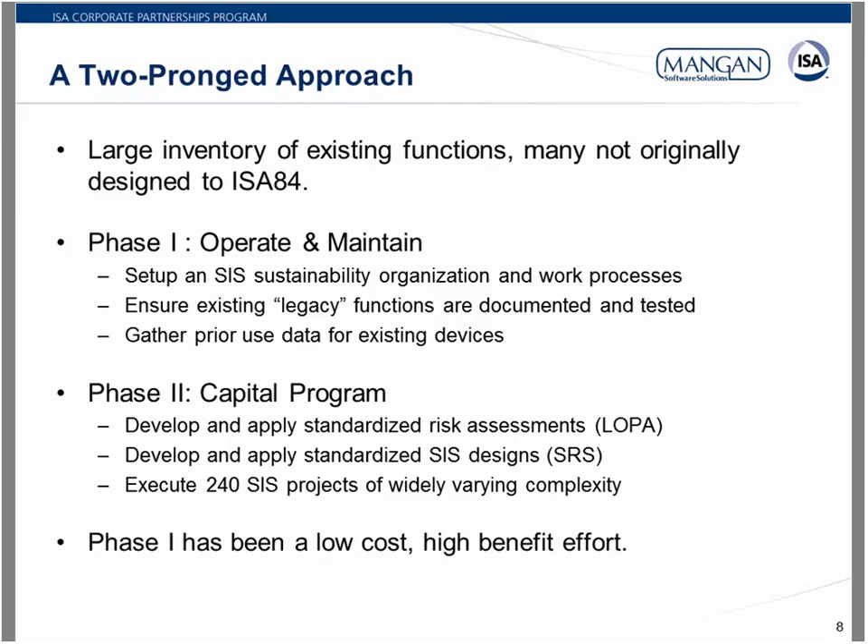Okay, thanks, Alec. So with that, we're going to move to our first poll question.

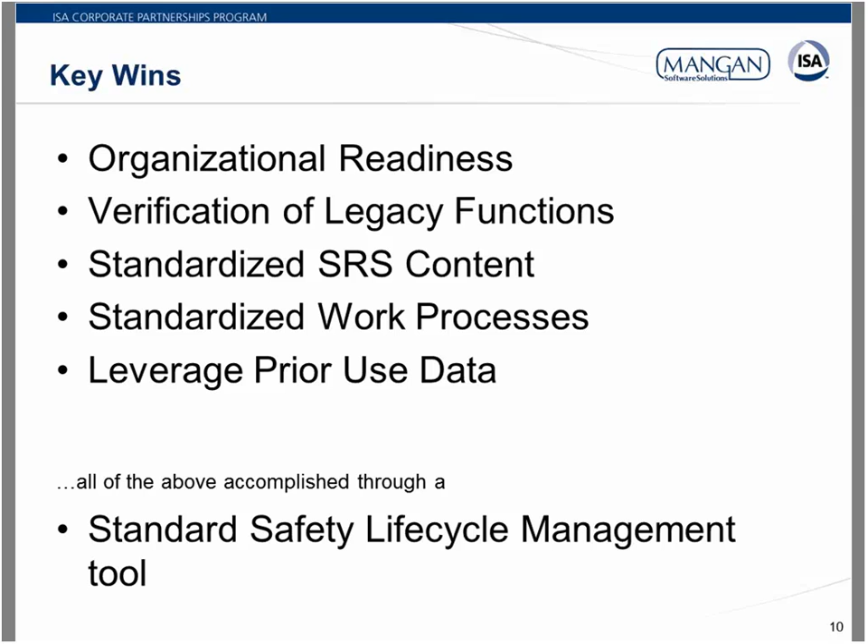So starting off, design of the SIS organization. One of the things we recognized early on was that the skills of SIS testing and maintenance are not the same as basic E&I skills. For example, knowledge of common mode failures, the importance of proof test coverage, et cetera - these are not things in the basic E&I toolkit. So the first step for us was defining these required skills and competencies and starting to track them.

To facilitate that, we created designated SIS O&M coordinators at each site, and also SIS engineers, and then a dedicated SIS group reporting to the O&M coordinator. Subtly but very importantly, originally many of these teams were based out of technical organizations - with the history of SIS, it kind of originated out of technical organizations, and that knowledge has stayed there. So we're making a conscious effort to push that knowledge and work processes out of the technical organizations into the maintenance and reliability organizations. Having these designated contacts is a key part of that. We'll get into more detail on that later.

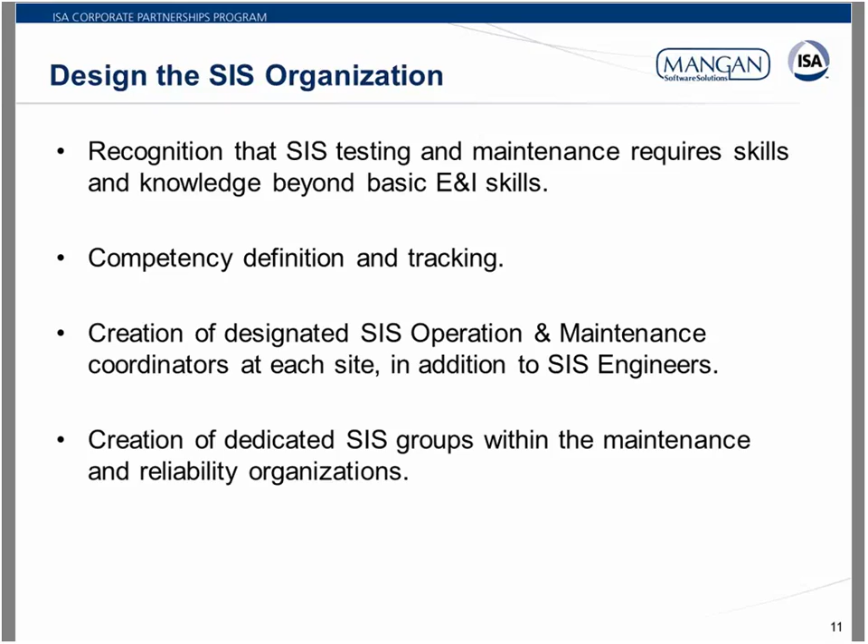Verification of legacy functions. So I started off earlier by stating that we have a large inventory of existing functions, which we just generically call legacy instrumented functions. Many of them are clearly safety functions, although they may or may not have a formal risk assessment to back that up. Others, it's unclear whether there should be safety functions, and we await a risk assessment to back that up.

Ultimately, the first problem is simply to record all of these protective functions and document them as carefully as we can. Only then, after we've gathered the data, can you make a decision on what happens to that legacy function. Options being to grandfather the function, to replace it, or ultimately to decommission it.

One of the challenges we faced with our centralized program is we need a standard process to ensure that, number one, we're making the right decision on these, and number two, that we're making the same decision from site to site in a consistent and efficient way. And then in the interim, we have the problem of how do we do our due diligence to make sure that we're providing adequate safety. One of the key questions there is about testing frequency.

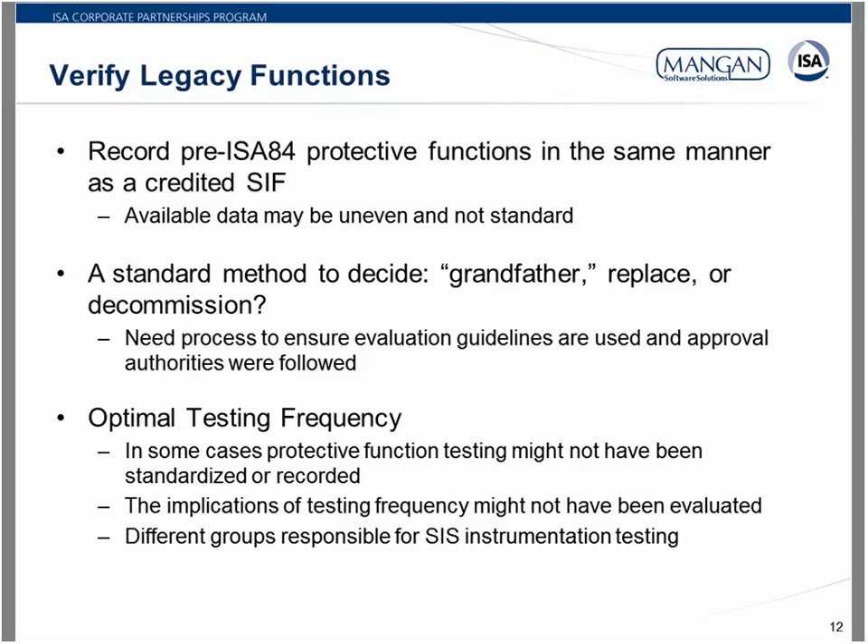The next challenge we faced was what does an SRS look like? And for anybody that's worked on a safety requirements specification before, you already know that frequently an SRS is not a single document. It's multiple pieces of information that could live in multiple systems. Many of these systems are really outside of the scope of control of the SIS engineer. The example I give here is P&IDs. Obviously, the P&IDs are an important reference for the SRS. We want to ensure that if the P&IDs change, that it stays consistent with the SRS, but we simply can't take ownership of the P&IDs.

It's out of our control. And you could go on and list many, many other items in here, from cause and effect to loop diagrams and so on. And so what you need is more than a document, but a way to integrate all of the required information into one place. And beyond that, we want it integrated in a standard way. You'll find that depending on what SIS engineer you talk to, the definitions of what belongs in the SRS can be wildly different.

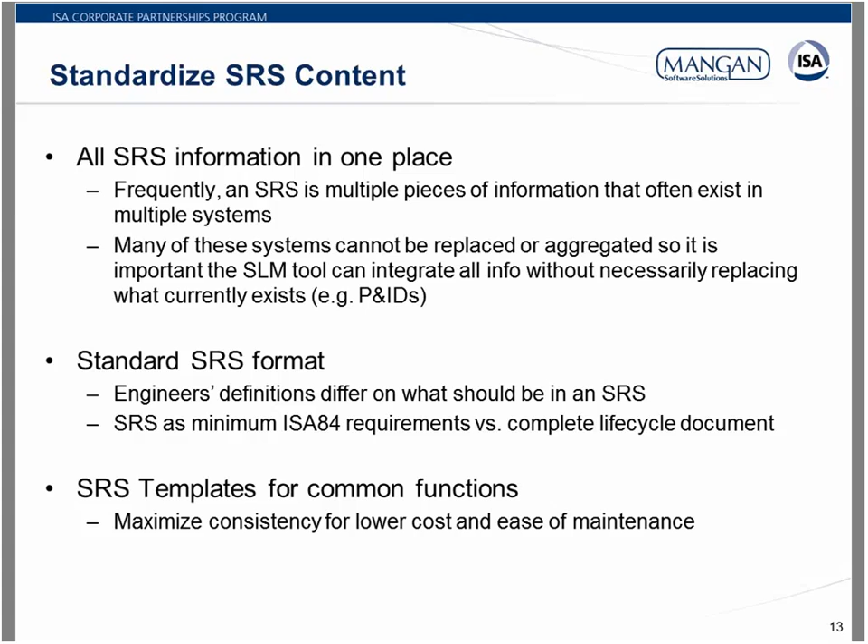As I hinted at on the previous slide, something that goes hand in hand with the standardized SRS are the standard work processes to support it. I think this is one of those aspects of life cycle management where many organizations fall down. A big part of the ISA84 standard is about the required verifications and functional safety assessments that have to be performed, and we want to perform those in a consistent way that will allow us to demonstrate compliance years after the initial project.

So the key requirements here are: we're looking for a structured method. We want every verification and every FSA to cover the same minimum items, to have the same structure, and to have the same types of participants. They're required participants with required competencies on these work processes.

And then finally, we need that standard revision tracking and approval flows to make sure that the system that we set up initially continues to be followed in the long term. And then to audit that, we have a deviation process to support that.

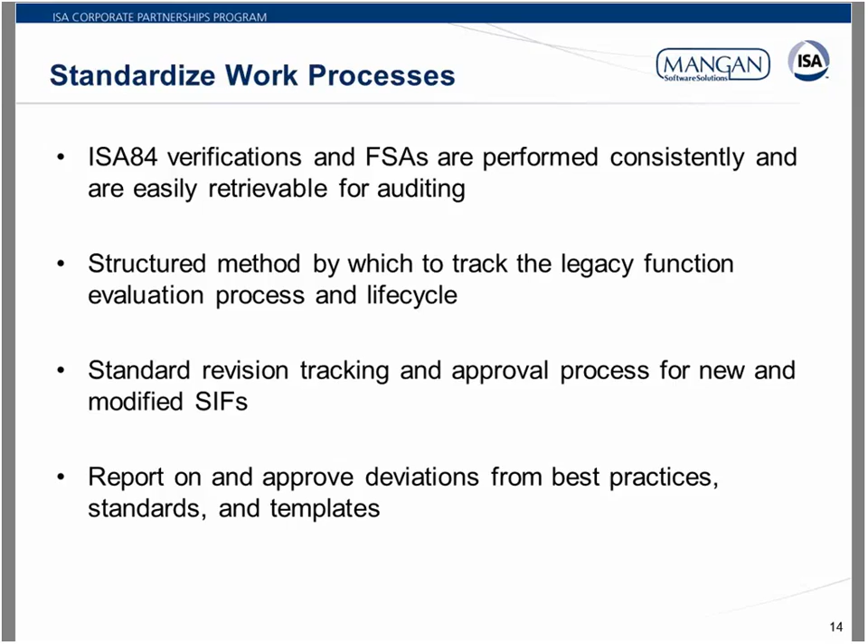All right, thank you. So I feel like now that we're doing the presentation live, I feel like I've just been laying out a laundry list of problems for the last 10 minutes. So this is the last slide of problems, and then I promise that we're going to get into solutions shortly.

So finally here, prior use data. It looks so easy, but it's not. What we found is that even if our operations and maintenance organization have been performing testing, there's no mechanism for collecting and analyzing that data. It may go into a maintenance management system, it may go into a file cabinet, but one thing it definitely doesn't do is magically transform into prior use data for SIS engineers.

So we need a standard way to group and categorize devices, because prior use data applies to specific devices in specific services. We need a standard way to analyze the data and approve the data. And finally, the overall process needs to be as automatic as possible, because experience tells us that if gathering prior use data is hard, it likely just won't happen.

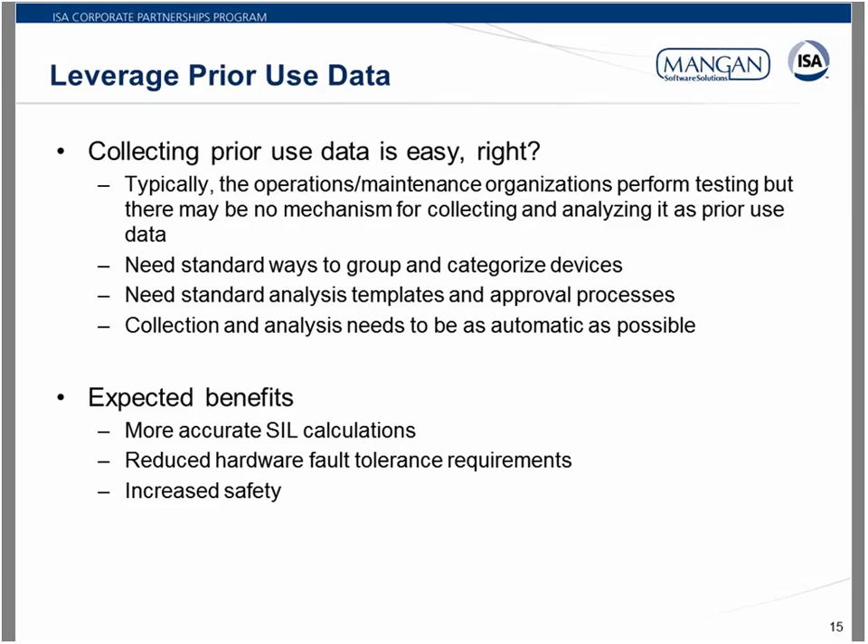So Alaric, any comments here? No comments here, I think we can press on. Okay, so now we are going to move into our second poll.

Go ahead, Alaric. So speaking of a laundry list of problems, with this next poll, we do want to understand for the audience which of the previously mentioned aspects are most important to you. And with this one, please select all of those options that apply. What we hope to see with that first question is, are we far off the mark? Are we kind of chasing the correct targets here? And that's with regards to your opinion.

Stephen, in the leadership at Global Manufacturing, they've kind of come to the understanding, in speaking with other SIS leaders, that they are, in fact, not alone in worrying about these various topics.

And for the second question, think about how many different databases, systems, or programs you require to demonstrate this standards compliance. For instance, where do you keep your loop drawings? Where do you keep your logic solver programs or calibration certificates? My suspicion is that if you really map out where these things live in your organization, we'll see those responses creep higher to the 3, 4, or greater than 4 options. I don't want to influence your responses, but I'll be surprised if a lot of people say one system, because what we found is that's just really hard. You're always going to have to live with multiple systems that have to work together.

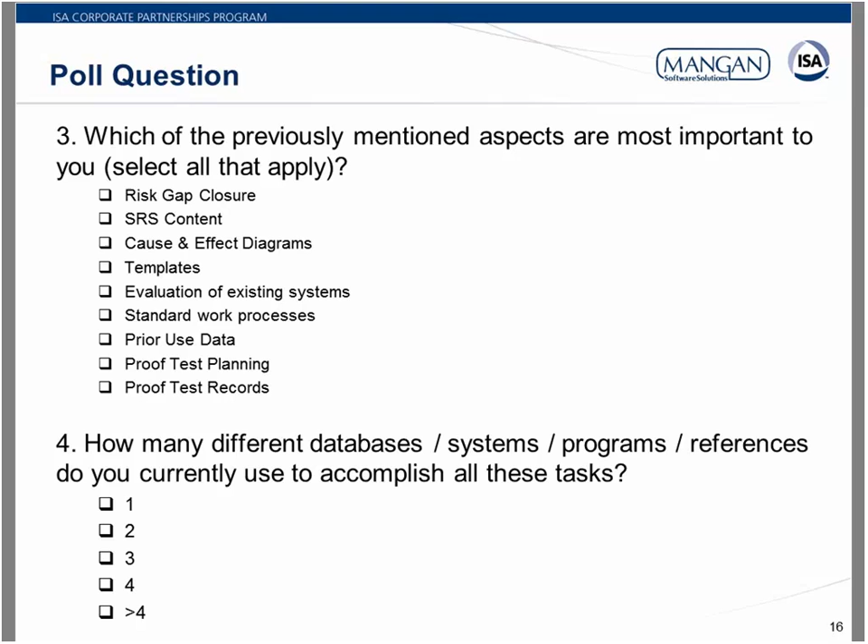Since we're running a little behind, why don't I move to the next slide while the poll's still open, and Alaric can give the overview of the next part of the presentation, then we'll come back to the poll results. Oh, they just popped in.

So I'm scanning the results on question 3, and we're seeing greater than 30% indication for almost every one of those options. It looks like option D there, which is templates, has the lowest response rate. Kind of interesting - we have a couple slides on the use of templates, maybe we can change people's minds there. But certainly the highest one looks like the evaluation of existing systems. That's interesting to see and makes me feel good.

That it's a common problem, everybody's in the same boat, and I think we're going to show in the next section some powerful ways to manage that process. On the templates, it's too bad we can't elicit responses, but I wonder if templates aren't so important to people because a lot of people already have them. That's based on my talking to people at other companies. Templates have been around for a while in some form or another, so I think what's a little more unique for us is the focus on the overall life cycle and taking our existing functions and bringing them into compliance.

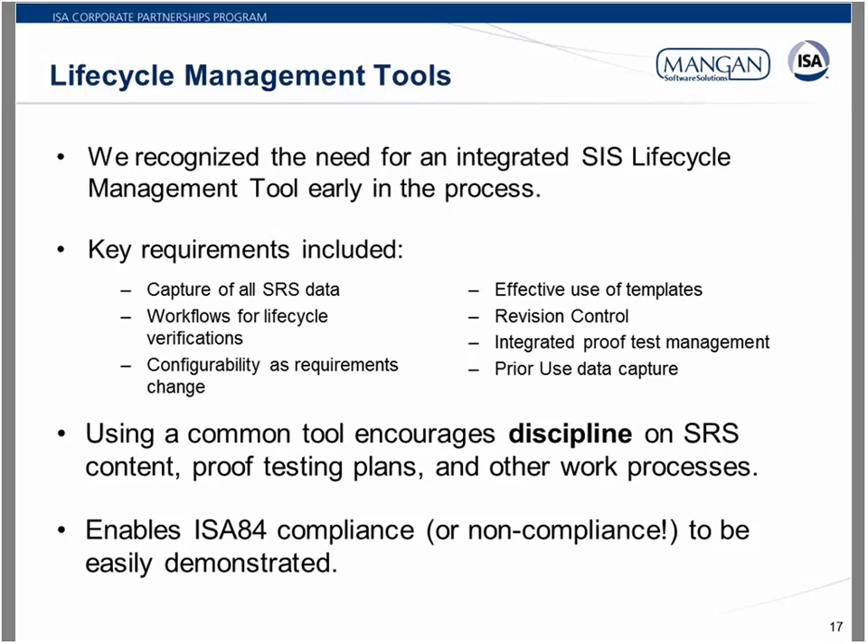So once the decision had been made to implement our SLM platform, we began to define its role within the organization by holding what we call a requirements discovery workshop process. In our case, we started with a week-long conference room workshop in which we gathered global manufacturing's corporate and technical leadership, the refinery's SIS coordinators, and the organization's IT project management, along with our team, to review the program's key requirements and then really talk about the nuts and bolts of how to achieve them.

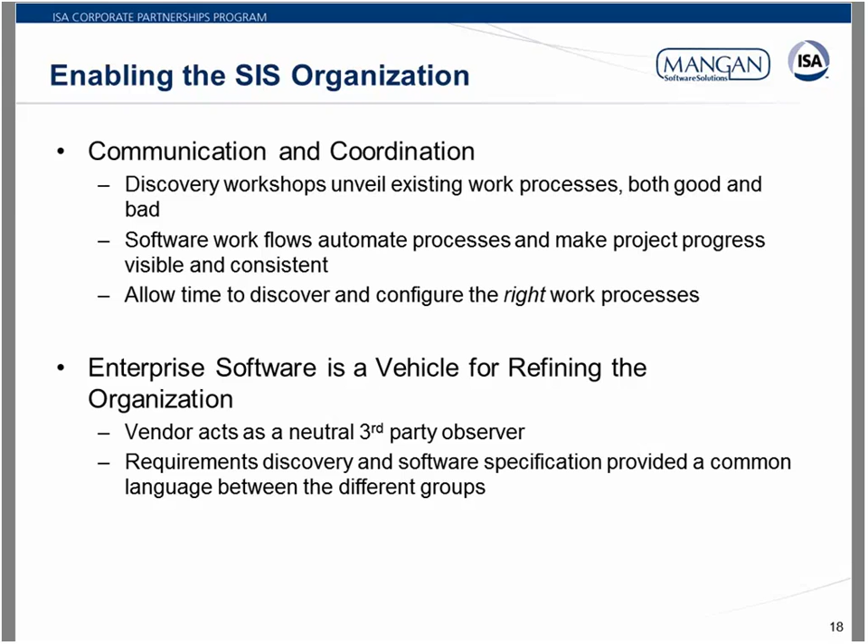For instance, the label for what we call throughout the presentation this legacy function had not even been decided until we sat down in that conference room at our first discovery workshop and said, well, what are you just going to call this thing? We have to give it a label in the software. Any other comments, Stephen? No, I think we can move on.

Although I call it a day in the life of an SIS organization, it really illustrates how we mapped the life of a safety function from conception all the way to decommissioning.

Somebody is not on mute.

Before I proceed, I want to deliver a sense of scope. Through the discovery process, we took what was effectively one page of requirements, and Stephen and I and a couple other members of the organization mapped it into 10 pages worth of workflow. We don't show it in the presentation, but all of those software touch points identified in the workflow eventually became 73 pages of software requirements.

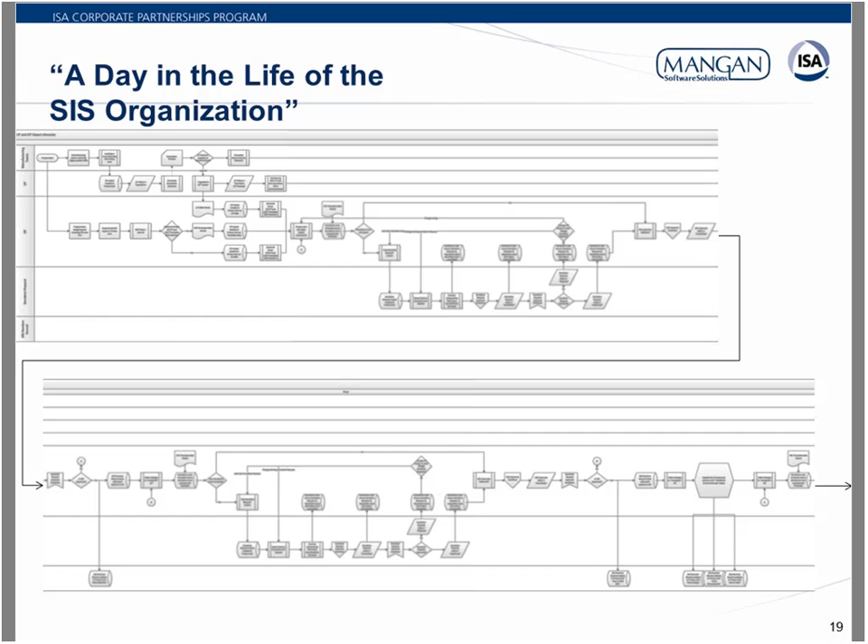The lesson learned should be this: if you can't diagram your work processes at this level of detail, you won't be able to configure them into the software and get the tool that'll help you along the safety lifecycle journey.

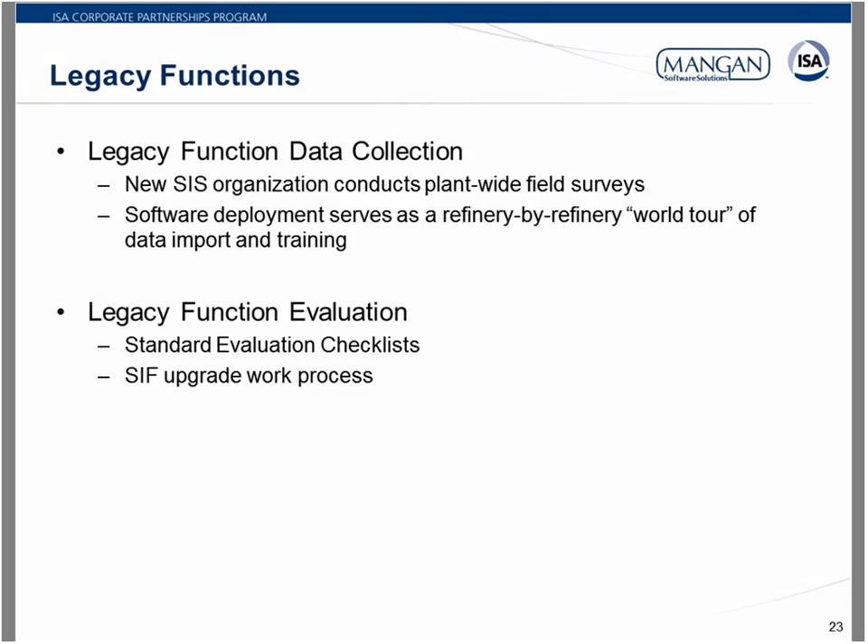And again, I want to stress the degree of adaptation involved. My team and I changed a software platform used primarily as a compliance tool to accommodate admittedly pre-compliant data entries. Stephen? Yeah, that's a good point, Alaric. We should emphasize that the legacy function, from a software perspective, was a new object that the system had to learn how to deal with in a system that dealt with SIFs.

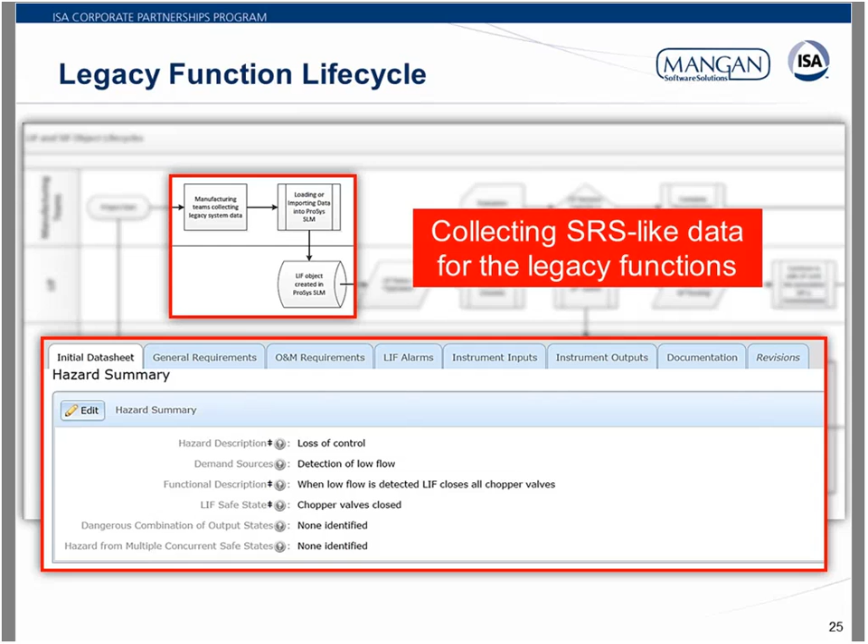One other thing I'd like to point out is we say SRS-like data. Specifically, it's a subset of the SRS data because, as Alaric said, the legacy function is just a temporary state. It either eventually becomes a compliant SIF or it's decommissioned. So rather than reinvent the wheel, we simply took a subset of the data you'd expect for a compliant SIF and used that as the basis for our legacy function documentation.

So on this next slide, we talk about what happens to the legacy functions while they're being evaluated in that interim state. This is such an important key requirement stated for the organization that I'm actually quoting a senior member of the global manufacturing team, with that slide title of Test Baby Test.

Now here again you'll see the benefits of employing a common software tool across an organization like this. Where testing procedures or frequency may not have been previously identified, the Phase 1 teams could now specify nominal testing frequencies and establish some form of standard test procedure across the enterprise.

Now standardizing test procedures was one of the expected positive outcomes of the effort, but as the refinery SIS organizations adopted the software platform and really started taking ownership of SIS testing, which in some cases was for the first time, they opened the door for further management discussion, and started asking questions like, how do we record demands? How do we approve or manage bypasses? So you can see here that they're starting to formulate the management of the operate and maintain phase of the safety lifecycle.

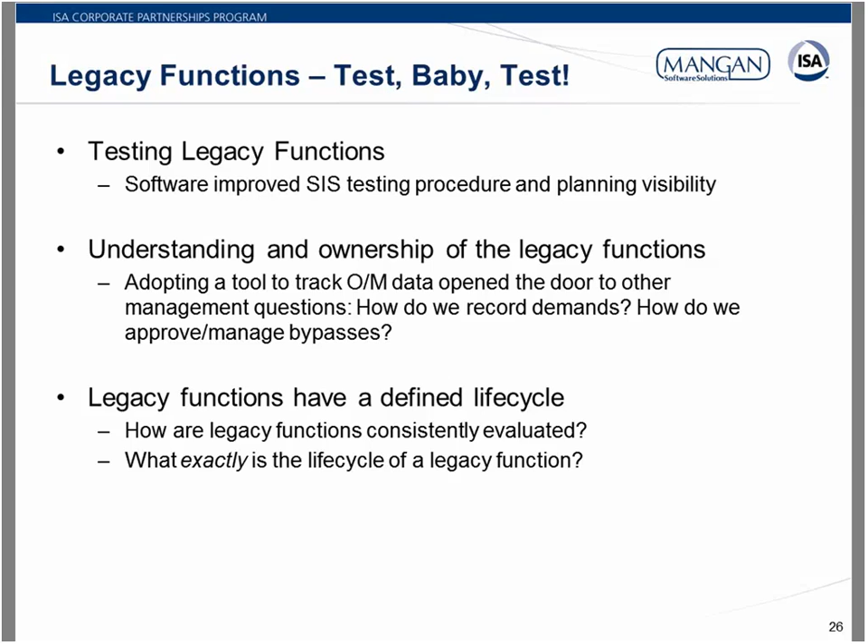So in a couple slides we'll address where the lifecycle for a legacy function eventually goes. But first, on this next slide, let's take a look at the outcome of this initial effort. This slide shows a screen capture of what we call the operate and maintain module out of the SLM software, wherein you see the collection of test groups, or procedures, and an example list of the legacy functions covered by that test. Just as a quick note, all of this information has been made anonymous for the presentation.

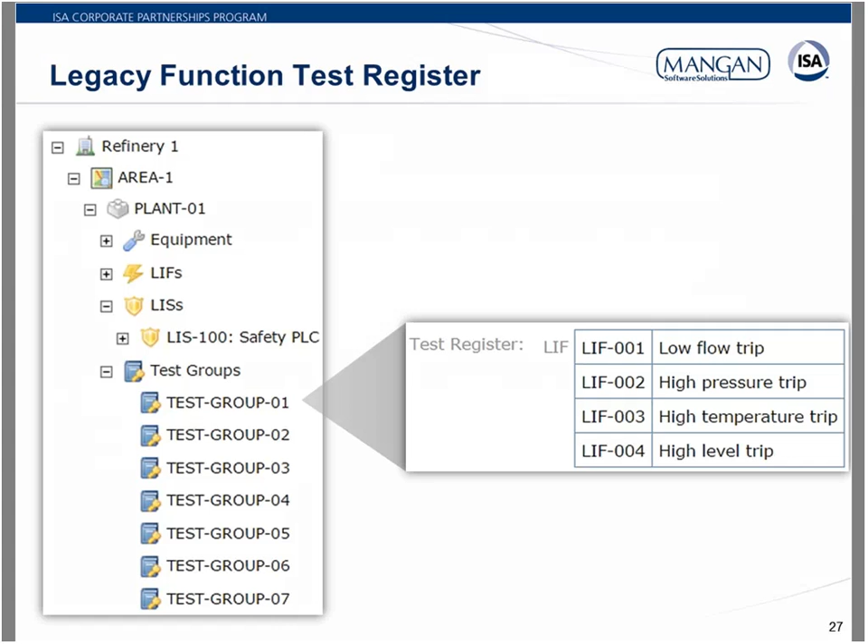Now at this point, the Phase 1 refinery teams have recorded, in very standard form, the legacy functions that are in place. They've kicked off an enterprise operate and maintain program, and now it's time to move forward in the evaluation of legacy functions. So I would just like to quickly add something I should have mentioned earlier.

If we have a legacy function in place and we are shooting for full ISA84 compliance, that doesn't necessarily require a rip out and replace of what's there. In some cases, compliance is a paperwork exercise to make sure that your documentation, procedures, and verifications and validations have been done. In those cases, all of the work for defining test procedures and gathering data for the legacy functions is immediately transferable to the ultimate compliant SIF.

You got it, very good comment there. Because as we move along the program workflow, we actually get to those steps and sub-steps which drive what I call the final determination of a legacy function. So we're going to be looking in on some closer points in the workflow.

As Stephen alluded to, that final determination begins with the completion of a 21-item evaluation checklist, which you see represented in the screen captures from the software here. I did blur out the individual checklist line items to protect their evaluation criteria. We did a lot of work to get these, and we don't want you all just stealing them.

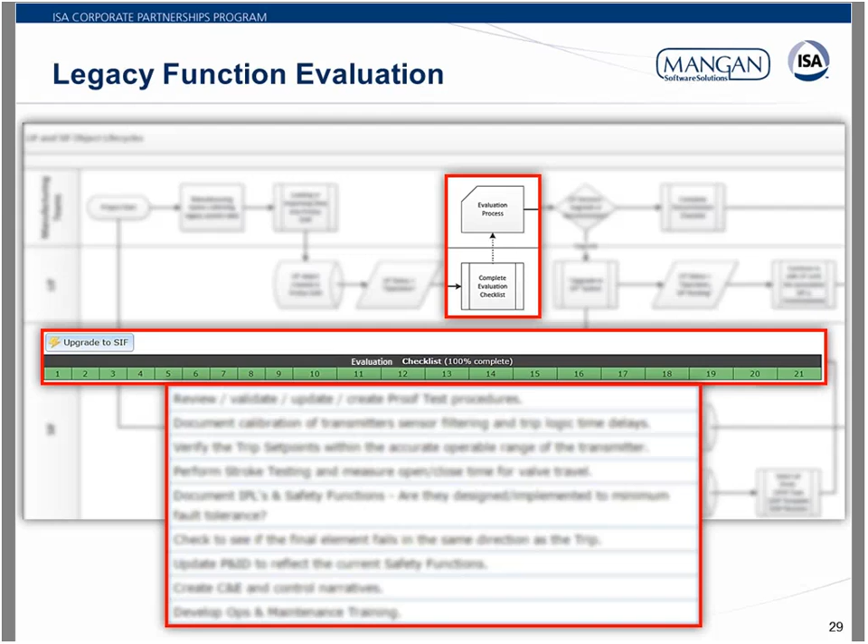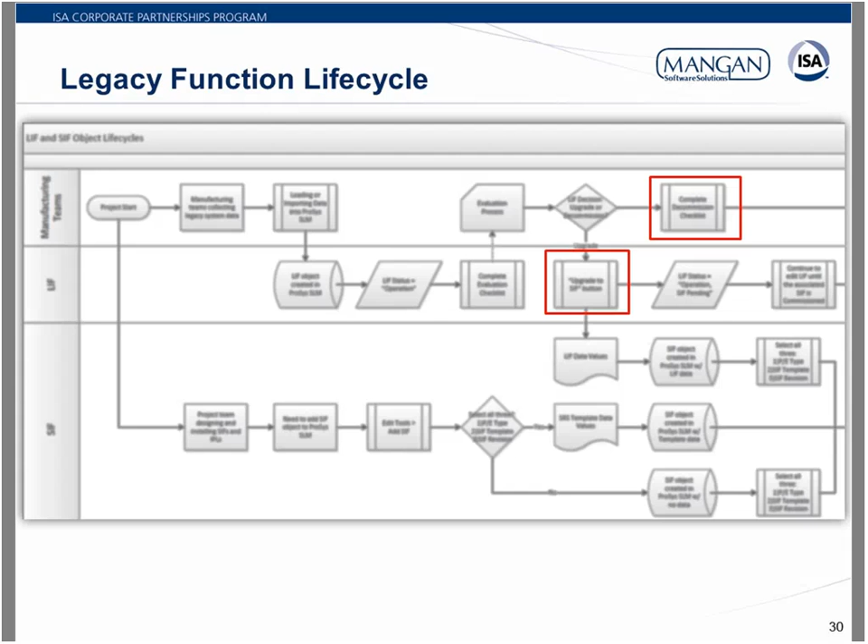As we move along this lifecycle workflow, you see there's a couple different paths that we can follow, leading towards the eventual end of the interim state, which is the legacy function.

Zooming in here on the workflow, we have ultimately two options for resolving that legacy function. Number one is considering the function creditable and then eventually ascribing some SIL level to it. In the software, this involves a workflow to upgrade the database object to a safety function. Path number two would be to take no credit for the function and decommission it, which in the application would archive the functional data that had been built up to this point.

Either option involves workflows which are managed by stage gate checklists in the software, which you see in these other screen captures.

You don't see the application logic in this section of the workflow, but in those instances where a legacy function is upgraded to a credited safety function, we tie the commissioning of the ISA84 compliant function to the subsequent decommissioning of the related legacy function within the database. Some of the equipment may remain, but at least in the database we make that change. This creates a figurative switch that gets flipped between the pre-verification function in phase one and the ISA84 compliant safety function verified by phase two.

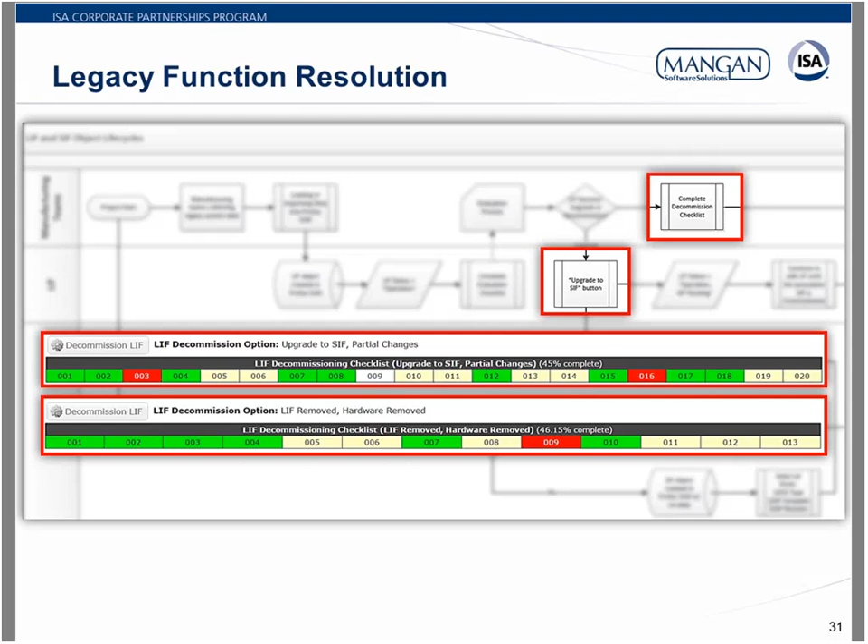So we've run the legacy function to its end, and that's where we can talk about the phase two activities. Phase two begins with the development of what we call SRS templates, and then continues with the specification of the project SIFs.

This is done in the separate phase two instance where you see a different mentality, where the phase one team is working with what they've got, so to speak. In this case, the phase two team needs to achieve consistency and efficiency, as Stephen mentioned earlier, through the standardization of SRS content.

We supported that effort by configuring the software application with features like custom fields, workflows, and reports. We'll talk about some of those in the upcoming slides.

What's also important is the creation of enterprise templates, defined by the central engineering team, to provide a baseline of standard data which speeds up the development of actual SIF SRSs. This is where Stephen mentions the approximate 25-to-1 leverage in creating the thousands of project SIFs during the program. We're also going to see how Phase 2 reports on SIF deviations can be created based on these standardized templates.

Stephen, any comments? No, let's move forward to the example.

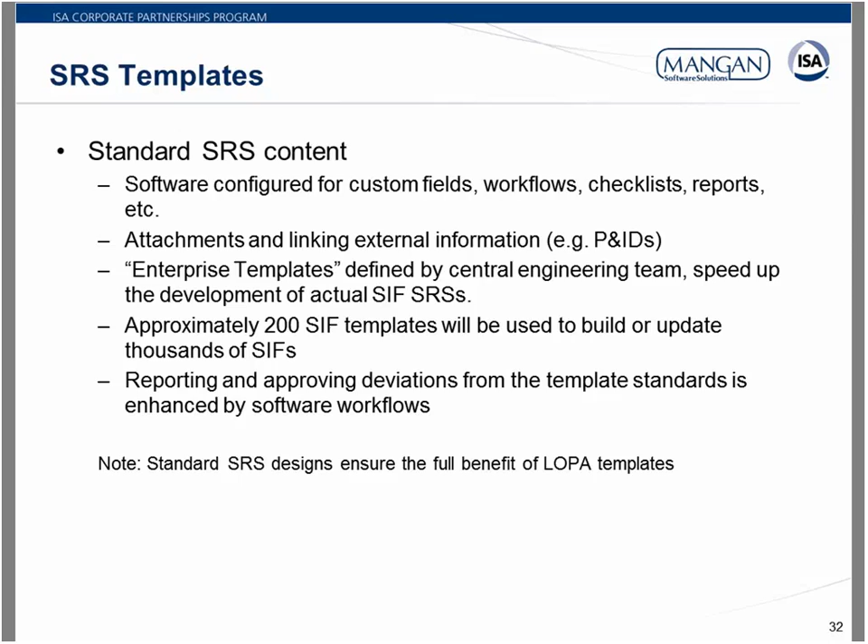All right, so now we're in a new section of our lifecycle workflow, and it's quite a large section, in fact, because we rope in all of these SRS templates.

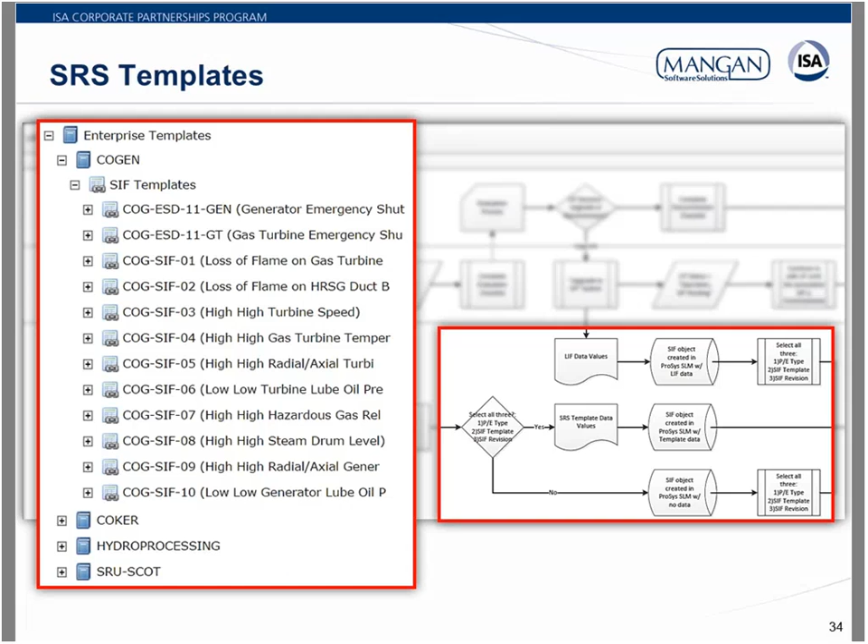So I'll just briefly add on this slide that this is all about consistency and efficiency. When we're talking about 5,000 functions, even if I only get the templates half right, that's half my work that I've reduced. And then beyond that, we'll talk about the importance of consistency and how we're helping to ensure consistency in some of these later slides.

So at this point we've established the SRS templates and described how they are really created in baseline form. So we need to look at the further development of safety functions, and in particular we're going to talk about how deviations can be handled, and it'll be deviations from those templates.

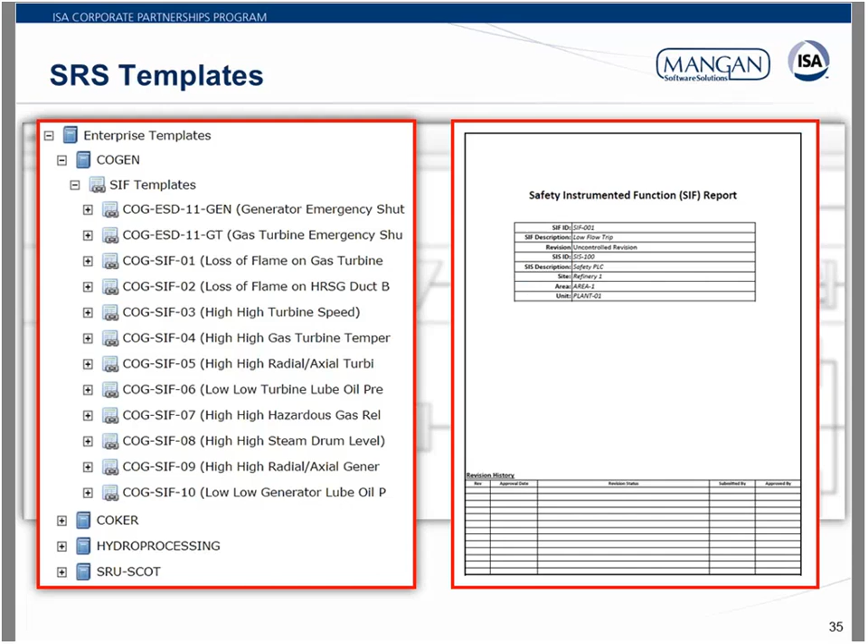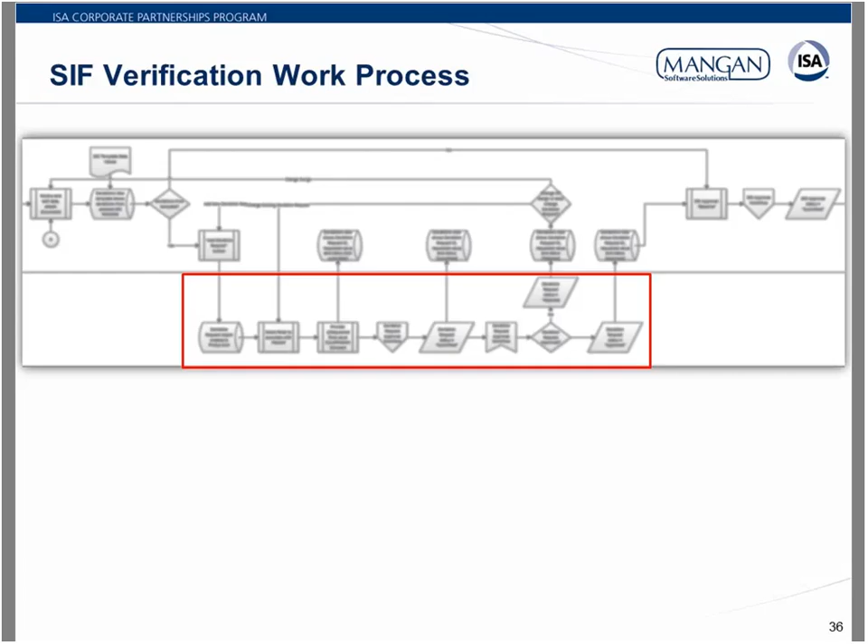Now, in addition to the variation and proposed justification, the Phase 2 personnel can come in and indicate the impact of change in various categories: safety, reliability, cost, operability, maintenance, and lifecycle. And then deviations, and it's important to note these are the actual safety function, where it deviates from the template, gets approved up to Stephen's level, typically, in the software.

And it's important to note here that that deviation reporting and approval process is another one of those what I call elegant solutions to replace what is originally a paper-based and manual process when Stephen first envisioned it.

So I would just add on this quickly that I want to emphasize that this is item by item, data point by data point. And if you really think about this, it's extremely powerful as a life cycle tool that ultimately you'll be able to run a report that tells you every place where one of your safety functions didn't follow the template best practice, where it didn't follow a corporate standard, et cetera, and will forever have the approval of those deviations documented and justified.

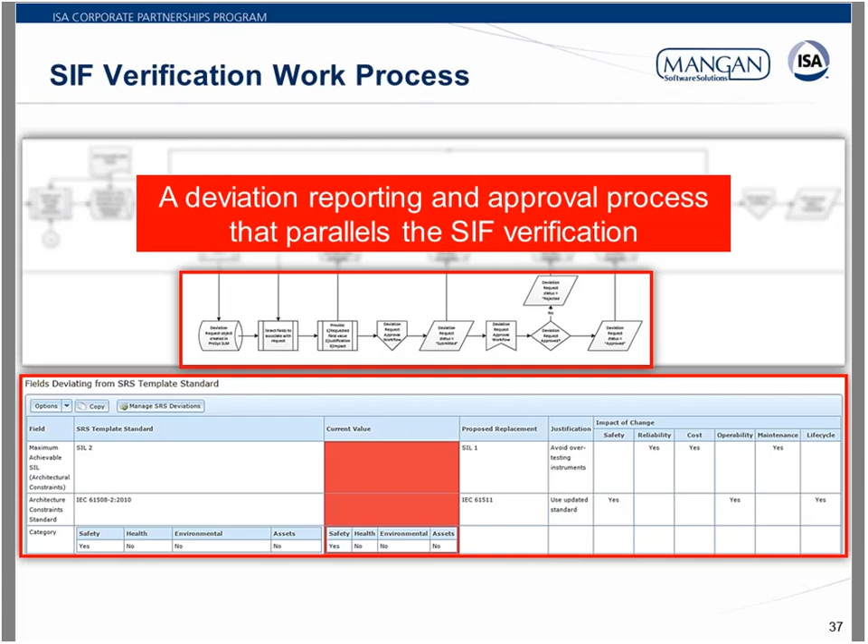And kind of moving on here, just talk about safety function required documentation. You'll remember from earlier that a fully realized SRS needs to link to other documents such as calibration certificates, P&IDs, instrument data sheets. And therefore, as part of this verification process, the software application reports on whether those requirement document types have been identified and linked on a per function basis.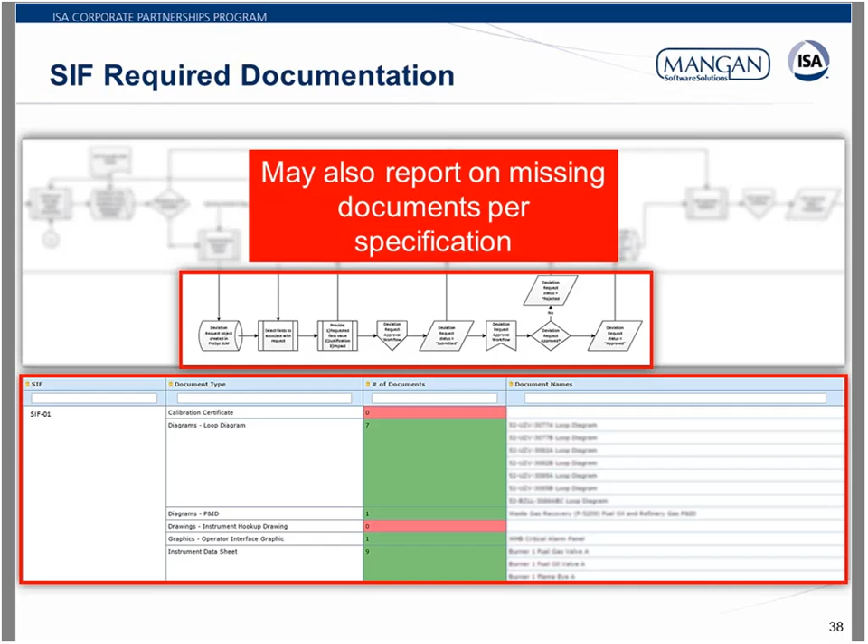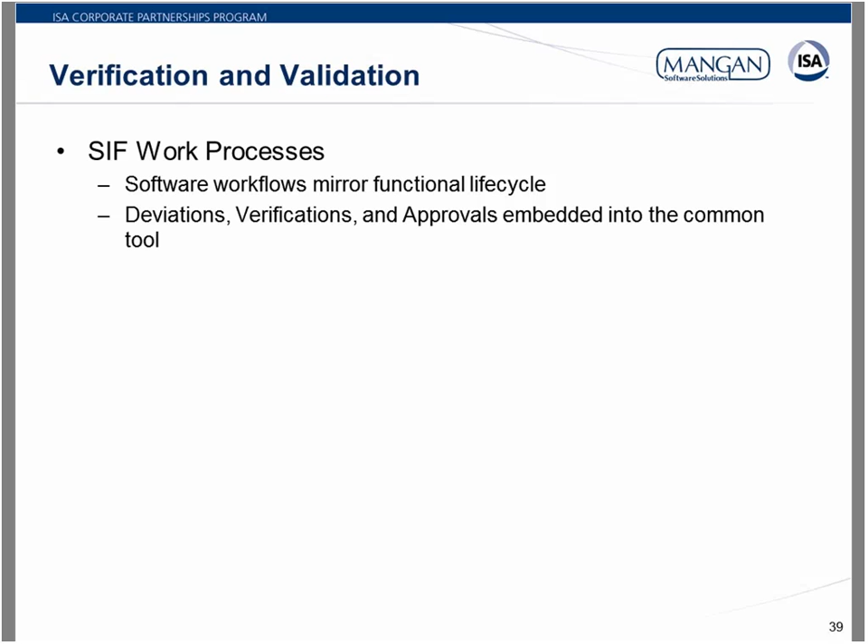So up to this point, we've been talking about various options like the application of SRS templates, deviation reporting, linking other documents, all of which build up to the functional verification of these safety functions within the life cycle. So let's jump into how that works.

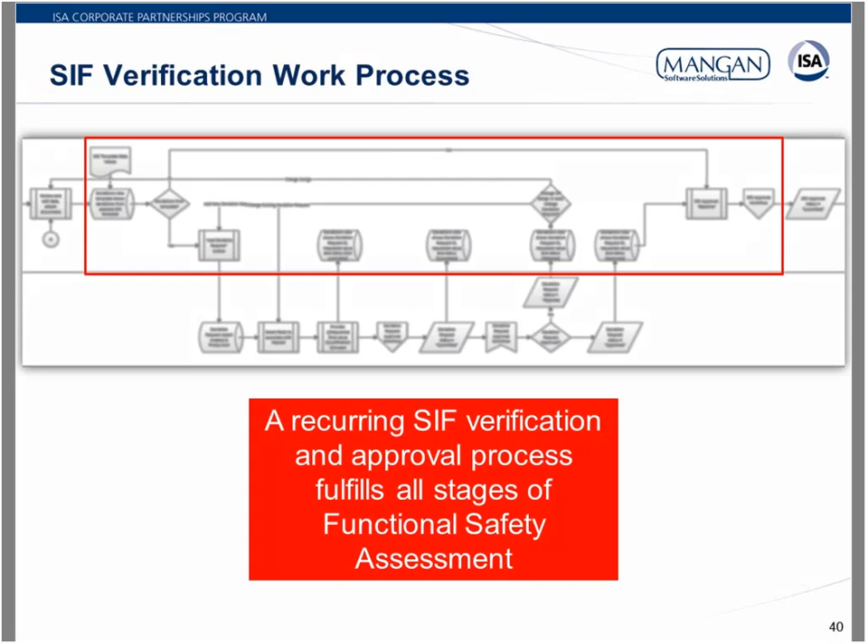So to meet Stephen's needs, we designed a recurring SIF verification approval process within the software. I'm just going to zoom in on this,

These are the project approvals we configured for global manufacturing, which mirror their capital project stage gates. You'll see that the life cycle starts with the baseline version of SRS, then moves on to initial SRS

and continues up to installation, commissioning, and eventually decommissioning. Now, I call it a recurring approval process since at approval, we end up saving the safety requirement specification for that project stage, but the functional data within the database remains evergreen as the Phase 2 team moves on to the next stage.

And you'll also see here, though I've blurred it out, at the commissioning step, the software has a couple conditional logic requirements. These are going to correspond to status within the associated legacy function, if applicable, and the overall approval of the SIS for that particular unit.

So why is this important? I would say we probably didn't realize its importance initially. We actually had various stages of the SRS defined in our SIS standard, but what we realized as we were working through the work processes was the reality was we live in a project environment. So even more important than the SIS stages are the project stages.

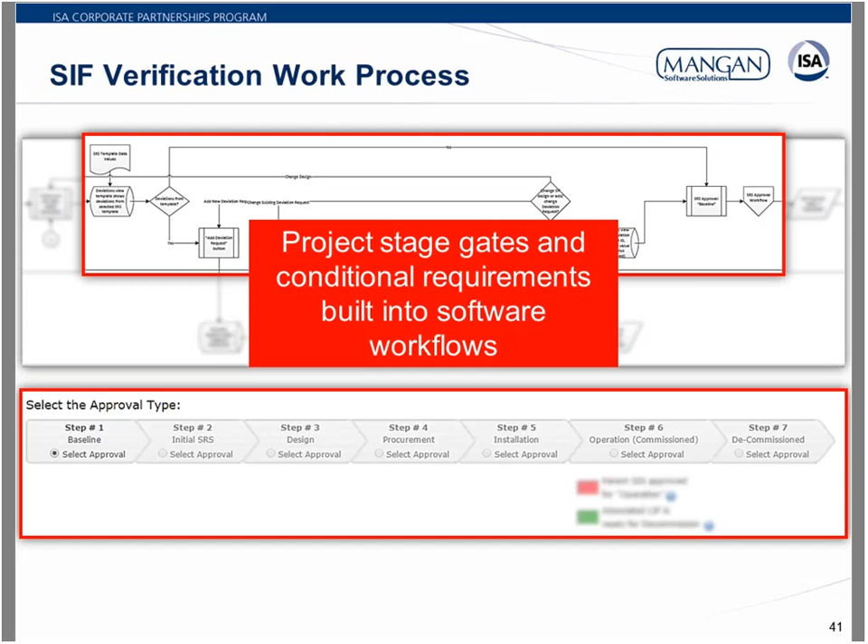Right now, that's the final piece of the safety lifecycle and the final part of the software integration that we wanted to cover in the presentation. From this point, the several other remaining pages of that workflow deal with the continued operation and maintenance of the safety functions. It does lead all the way up to eventual decommissioning, but we have time for just one final poll before we move on to lessons learned, so let's take a look at it.

So to kind of wrap this up, we want to ask folks, do you apply LOPA or SRS templates? And then for those that apply templates, assuming you manage deviations from them, that's part of the point of having templates, how do you do so?

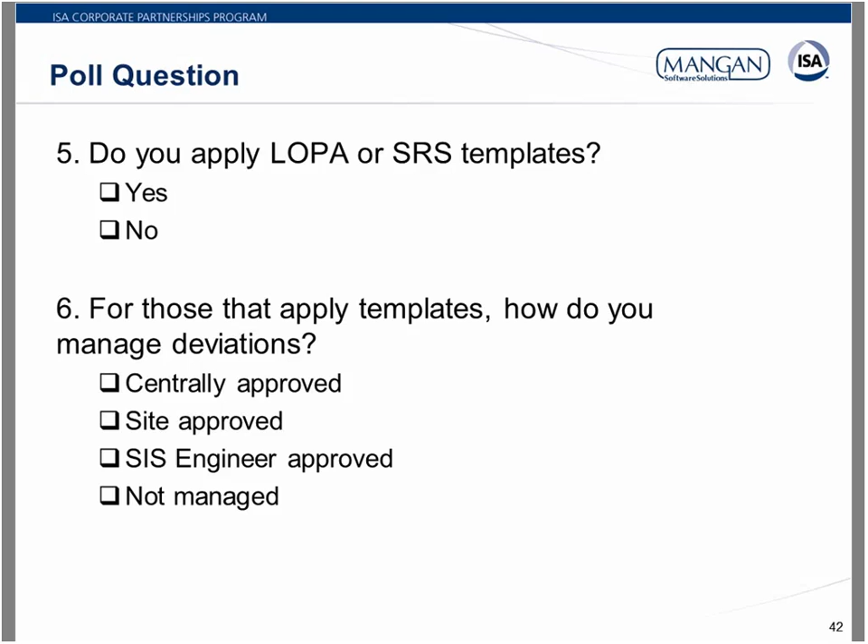Speaks a lot to the organizational discipline, and that kind of takes us into our final slide, which is lessons learned. So Stephen, you want to kick off here?

This is where, in particular with the Phase 1 group, they were more keen on really defining what their next action should be. And it was an uphill battle for me to keep them focused on the longer-term desired end state.